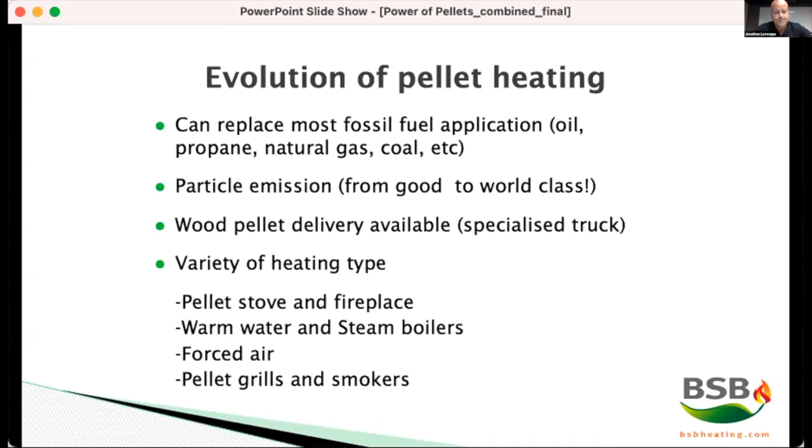Next slide. Pellet heating is high tech. You can have automatic heating operation with high efficiency combustion. It's no longer like the old wood stove where you increase or reduce the draft, or add more fuel if it's colder outside. It's all done automatically now.

Automatic feeding - you can have a system where your hopper feeds your system automatically. For cleaning, basically all you need to do is empty the ash bin. Most of the rest is done automatically now. It requires maybe once or twice a year an overall cleanup of your flue and system, but very little cleaning has to be done on a normal day basis.

Most appliances now offer remote monitoring - you can see from your cell phone with an app how your boiler or furnace is doing at your house or business. And like I mentioned, there's on-site delivery, same as oil or gas, it's no different now. I'm not saying it's all across Canada - there aren't many pellet delivery trucks yet, but the technology is there, so it can be done sooner, I guess.

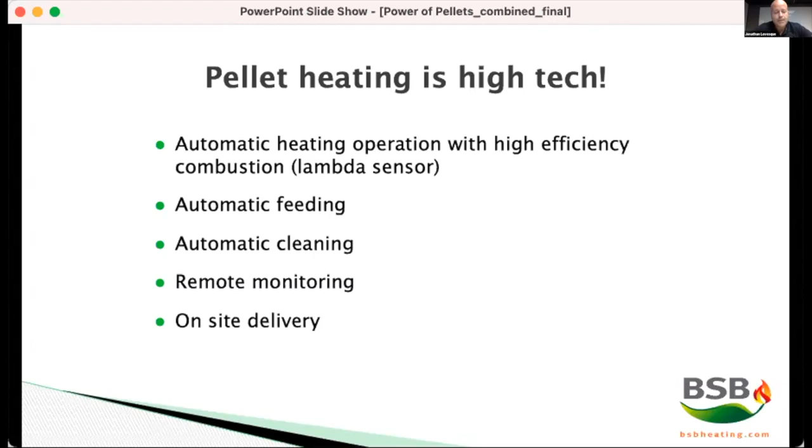Next slide. This is a typical warm water, or hot water, system, where you have a hopper for your fuel on the left, your boiler system, and a buffer tank. This is a typical installation for most hot water setups. Next slide.

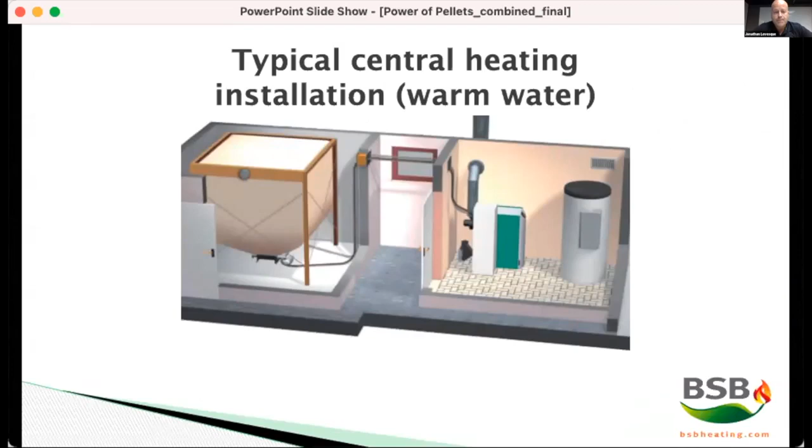Steam application. We're proud that we've done the first steam boiler in North America that operates off pellet. It's in Shippagan, New Brunswick, at the University of Moncton and the College of New Brunswick. It's a Binder 850 kilowatt unit, and it replaced an old steam boiler. Just look across Canada at the amount of applications that could be like this one - there's a huge amount of potential. Next slide.

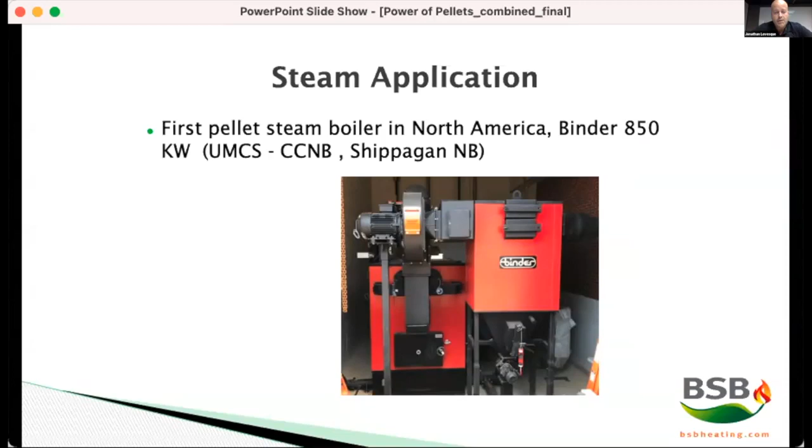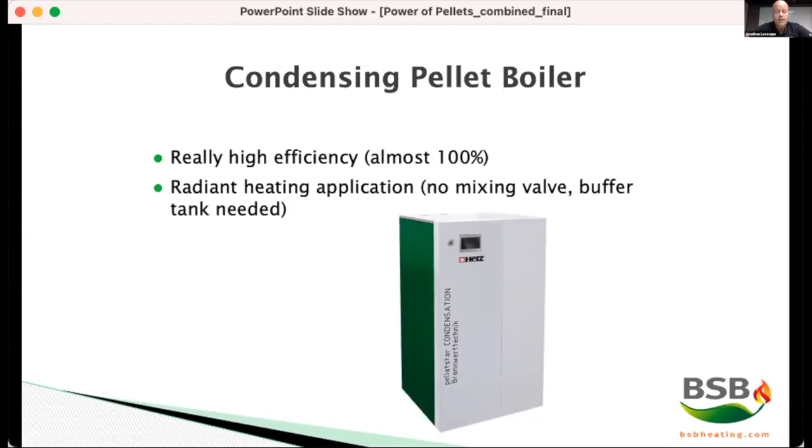Condensing pellet boiler - this is a newer technology, same as with oil and gas. It takes the energy in your wood pellets and can recover almost 100% of it into your hot water. The application is where you have water that's not so hot, not the typical 180 degree water, more like 120-130 degrees. This is the prime system - it doesn't require a mixing valve because you're already at the temperature for radiant heating, and you don't need any buffer tank. This shows that the technology is there and evolving on the pellet side. Next slide.

Forced air system - again, a typical installation that was done at JD Irving in St. Leonard inside their pellet mill. It's just a forced air unit, nothing complicated. It runs by itself, and it was installed a year ago.

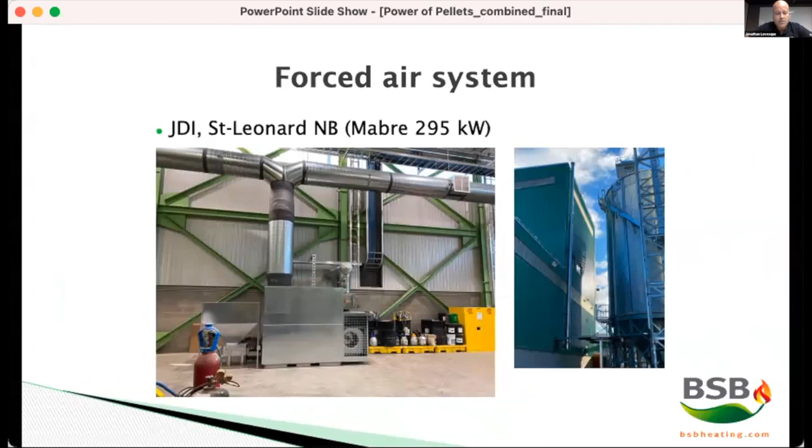Next slide. And at the end here, like I mentioned, same as we've seen before with oil or propane delivery trucks, there are some pellet delivery trucks as well. The technology is there, and here's an example of a local church having pellets delivered on a regular basis.

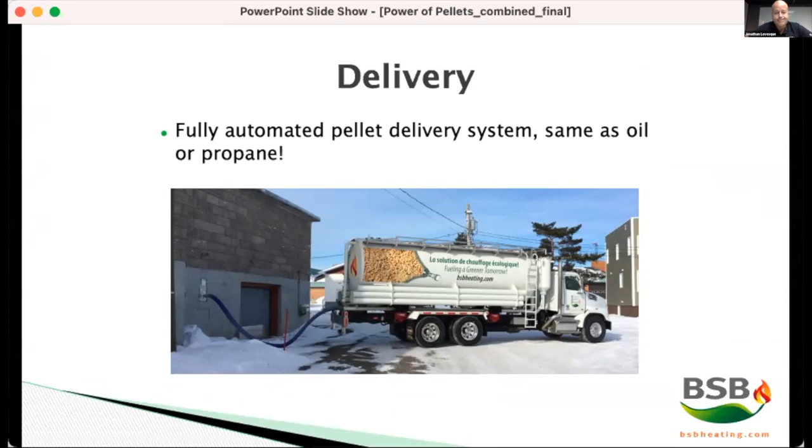Thank you very much. That was the quick overview of modern pellet heating.

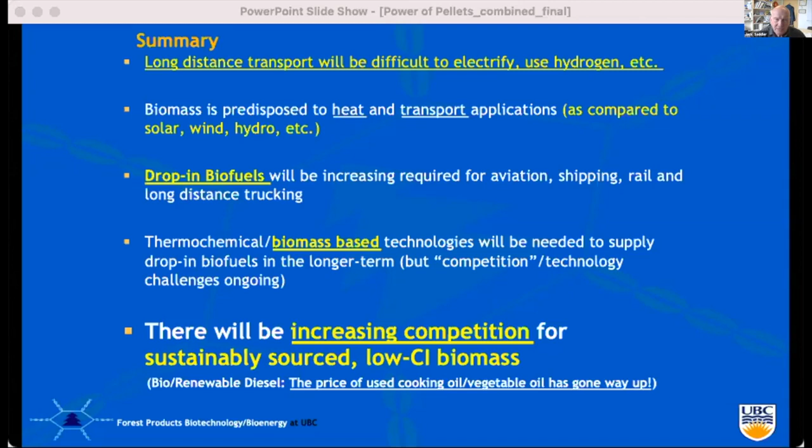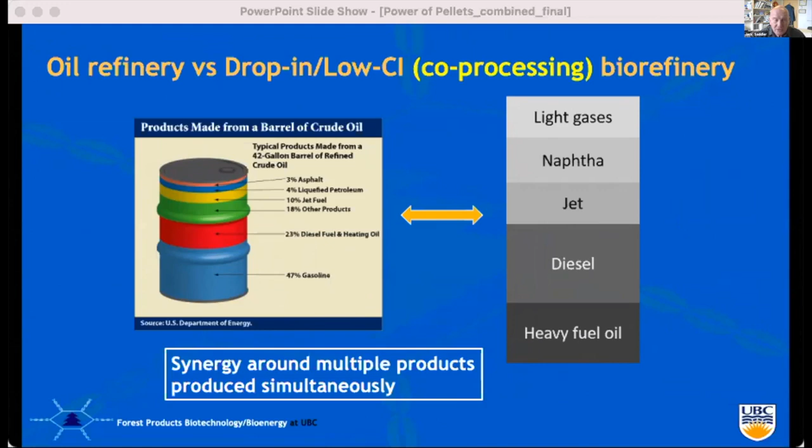The point I'm making here is if you look at taking a barrel of oil, you don't just make gasoline, you don't just make diesel, you make all of the products on the right-hand side. So what we've been working very closely with is some of the oil companies. I think another group that wants to decarbonize and knows it has to decarbonize is the oil sector. So what I'm going to cover very briefly is how you can use biomass to biocrudes as a way of decarbonizing the oil sector.

Most of you will be familiar with biodiesel and ethanol. If you look on the left-hand side, you can see they contain oxygen, so it's not a true drop-in. A drop-in is basically indistinguishable - you see the top of the slide, the IEA definition that took us a couple of years to come up with. Effectively, a drop-in biofuel is indistinguishable from fossil-based fuels. Bottom right, you've got HVO, HPO, some examples of a drop-in.

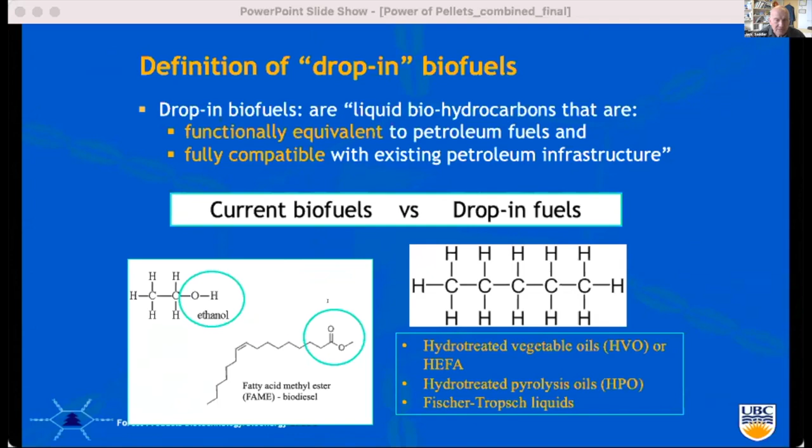This is work that was sponsored by Boeing. We've done this over about the last decade. So what Boeing looked at is where's a low carbon jet fuel likely to come from.

Canada's fortunate to not only have lots of biomass, but we're a major supplier of canola. If you look at vegetable lipids, we make a lot and we export a lot. This work was funded by Boeing and by GARDN, the Green Aviation Network. So this work looked at starting an initial supply chain using lipids and then replacing that with biocrudes.

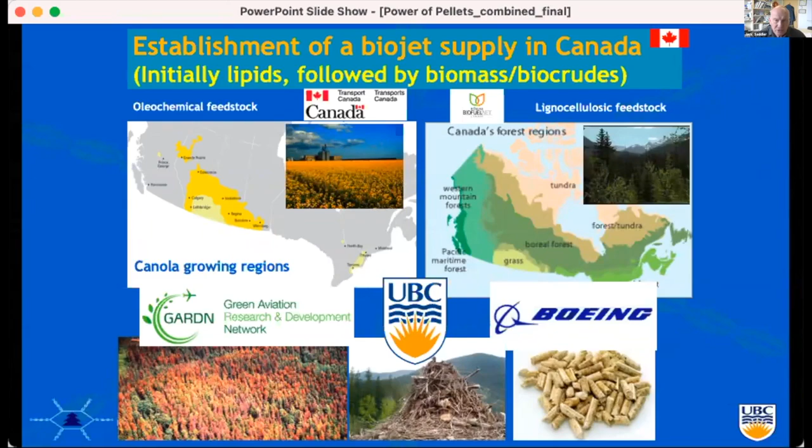The initial supply chain will be established with what we call conventional, low carbon intensive feedstock, like used cooking oil, tallow. As I mentioned before, one of the challenges with this feedstock is it's expensive, and also there's a limited amount. If you again monitor the price of used cooking oil, tallow, or even canola, it's been going up rapidly because of the very fast expansion in terms of oil companies using this as a feedstock.

So in the mid to longer term, we're going to need advanced lower carbon intensive fuels, and that's going to be via biomass derived biocrudes. It's going to be the longer term choice. It's better able to address sustainability issues, we think, as was covered earlier, because it's a residue. And hopefully it will be a lower cost than lipids, but that yet is to be defined.

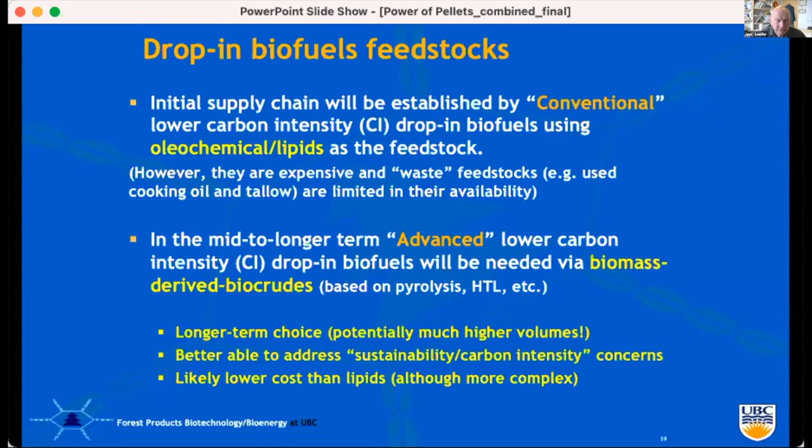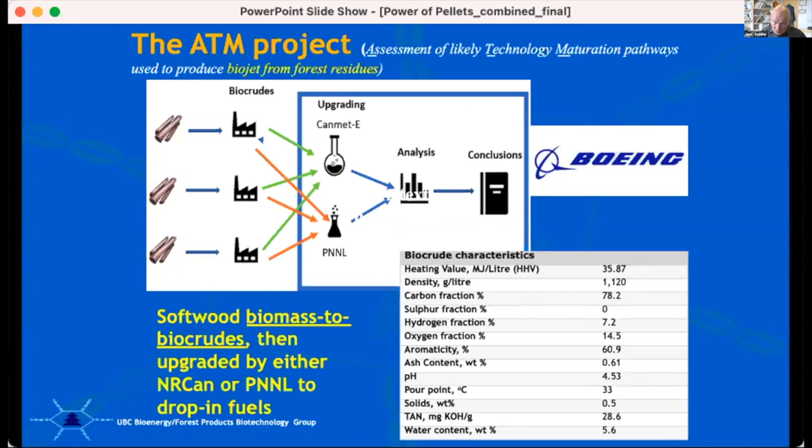This is a project we call the ATM project - Assessment of Likely Technology Maturation Pathways to Produce Biojet from Forest Residues, you can see why we called it the ATM project. We really looked at 3 different biocrude suppliers. It was upgraded either by CanMet in Ottawa or by PNNL in the US, and again this work was funded by Boeing. The full report is posted on our website or on the IEA website.

Biojet fuel could be successfully produced from softwoods. The biojet fraction meets the majority of the specifications and there are really no showstoppers there. What was attractive to us in the Boeing study is that emission reductions of about 70% were achieved compared to fossil jet fuel, and the techno-economic comparison made it reasonable.

So effectively, the costs were at least comparable with lipid-derived fuels. And if anybody's been monitoring what's going on in the US since the Biden administration came in, this is a very hot area, a very high priority for the US. There's increasing interest from the oil sector. If you look at Alberta, the number of plants going in, either co-processing or standalone facilities, this is an area of increasing interest and investment.

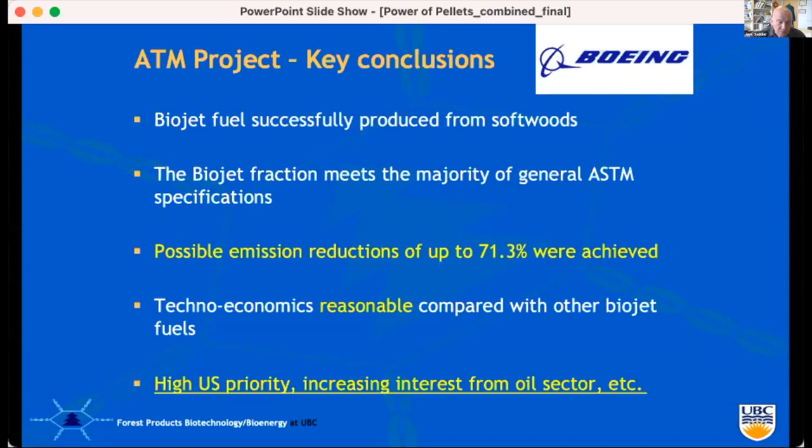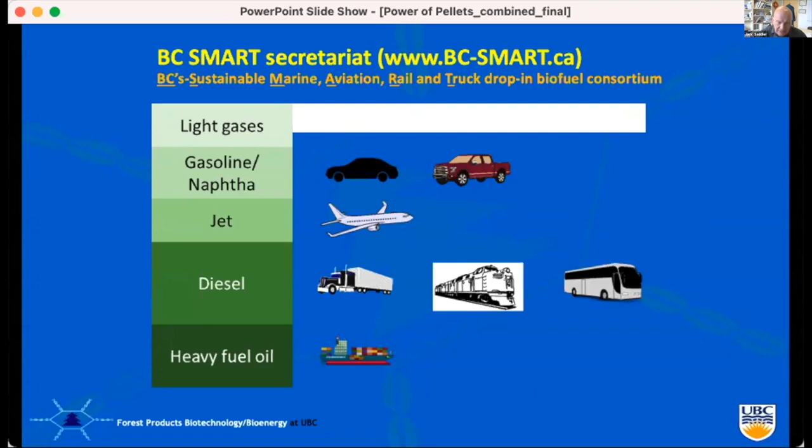So I want to wrap up on what we're doing in British Columbia. I'm going to talk about our BC Smart Secretariat — you can look at it on the website. BC Smart stands for BC Sustainable Marine Aviation Rail and Truck Drop-in Fuels. Again, the concept isn't just to make one fraction, say for jet, but to end up making a range of fuels that can be used specifically for the long distance transport sector.

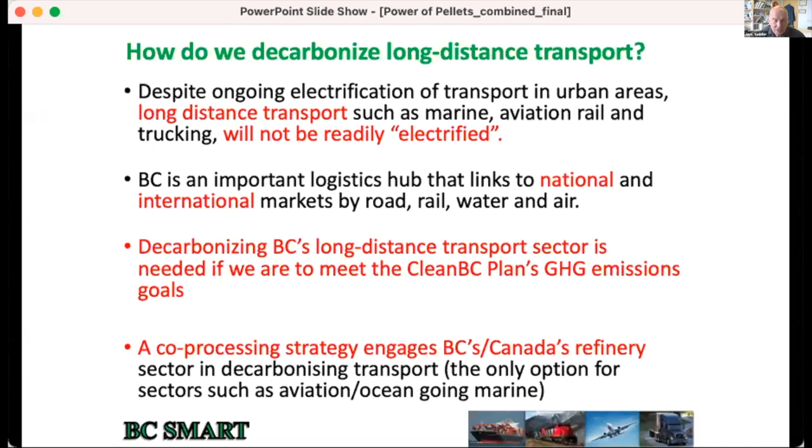Next slide, please, which I think is my last slide.

So really what's driving this is policy, because fossil fuels, I think, will continue to be cheap. We need these policies because even though fossil fuels are cheap, we all know the cost of climate change — we've had it ably demonstrated here in BC with the forest fires.

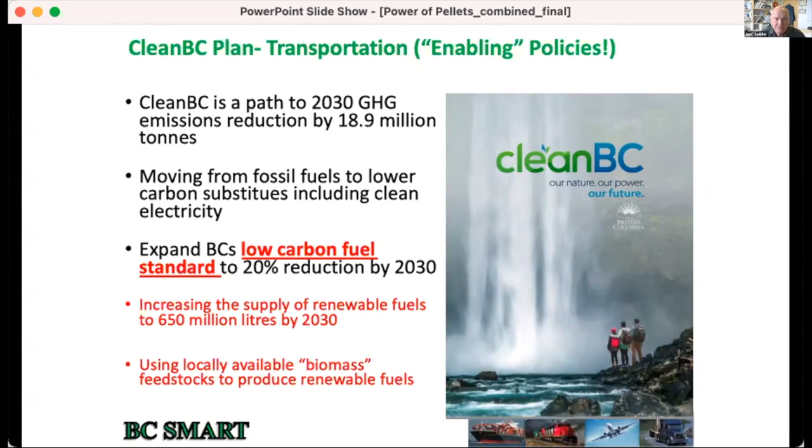Good evening. All right, I'm going to talk about creating the world's first carbon negative power station in the 2020s. Next slide, please.

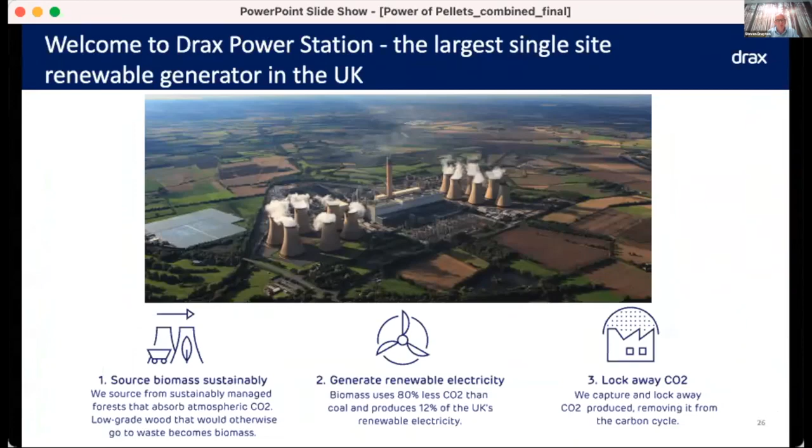So first off, a little bit about Drax. Drax power station in North Yorkshire converted from coal to sustainably sourced biomass. We generate 12% of the UK's renewable electricity, and we hope to develop the power station to lock away CO2 with our BECCS project. Next slide, please.

So our ambition and where we've come from: established in the 1970s, we converted our first biomass unit in 2013, and we ended commercial coal generation just earlier this year. We started experimenting with biomass back in 2003, and finally converted the fourth of our six units in 2018. We now generate, as I've said, 12% of renewable electricity.

And what next? We now want to go from carbon neutral to carbon negative. In 2019, we piloted carbon capture at our biomass facility in Yorkshire. In 2020, we established a second pilot facility that's informing our feed work for our large project. Hopefully going forward in 2024, we'll begin construction on the CCS aspect of Drax Power Station, which will enable us to capture 4 million tonnes of CO2 per annum per unit.

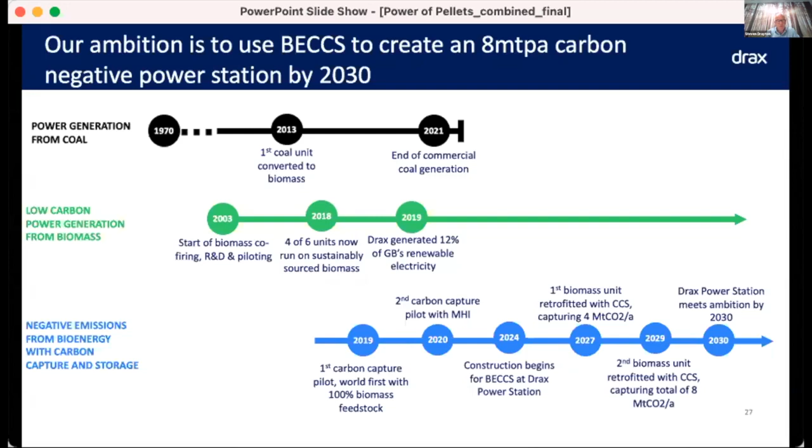So what is BECCS? I'm pretty sure everybody on this call knows, but I'll give a quick overview. It's about breaking the carbon cycle: sustainable forestry, and the residues that come off it, absorb carbon as the tree grows. We break the cycle by not releasing it, but capturing it and storing it in geological formations. That's it in its simplest form.

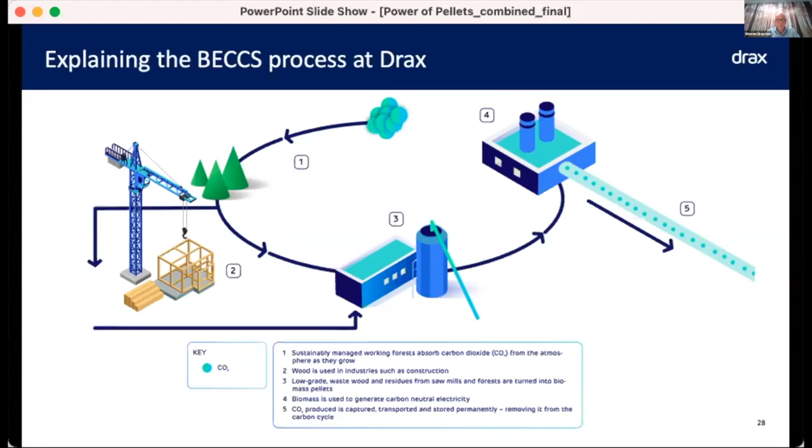So where are we? Well, Drax has got the UK's most technically advanced CCS project. We've had two solvent pilots running at Drax to determine the flue gas compatibility with the solvents in use and working out the degradation rate of those solvents.

We've done some testing at SINTEF in Norway on various types of biomass to fully understand the effect it has. We've completed pre-FEED work on our project at Drax, focusing on the CCS retrofit of two biomass units initially.

We've started the development consent process, which is the planning permitry in the UK. That commenced in Q1 this year. And we're looking to submit the development consent order at the beginning of next year, which hopefully will give us approval to commence construction in the second half of 2022.

We've put in place a license agreement for the capture technology. We are now tendering and due to announce very shortly the successful tenderer as our EPC partner to go through the feed and detailed design to enable our project to become real. We should start that feed study in the back end of this year.

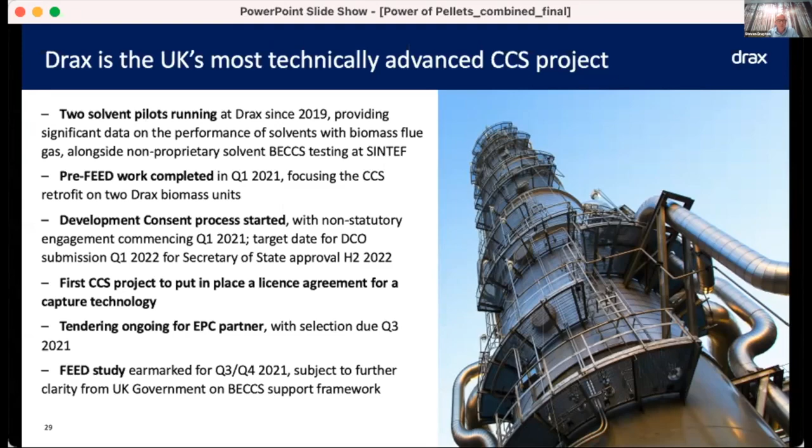So what else? What else could we do for the world? We're looking at how we roll out this around the world and do BECCS work globally. The objective really is to look at the concept and figure out how to do it better with an integrated concept design on a new build power station, therefore getting the efficiencies integrated for the heat rejected back into the system and making the old system more efficient.

We're validating the assumptions we've created through the work we've done so far and looking at the efficiency gains from the complete heat integration. And then we're looking at new geographies where it may be strategically aligned with our goal to develop. Some of that is dependent on policy.

We're looking around the world for places where policy exists towards biomass, CCS, negative emissions, and infrastructure is there or thereabouts. We're looking for locations where sustainable biomass is at the heart and the forefront of the area. This will encourage sustainable forests and allow us to deliver BECCS around the world.

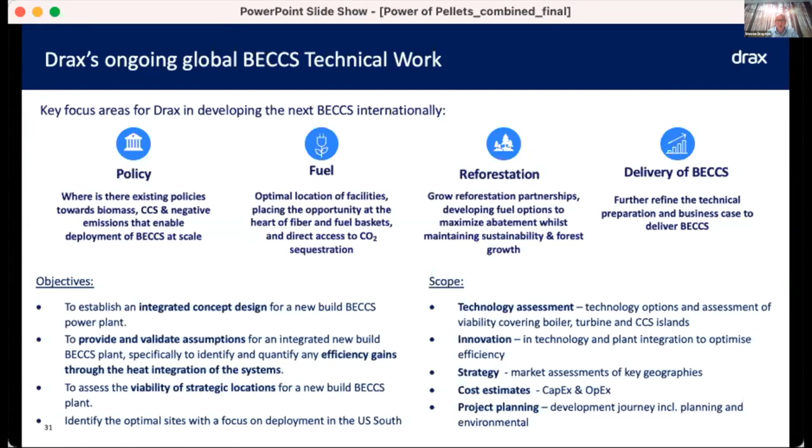And that's it in a nutshell. I think I kept to my time, so hopefully in the good books.